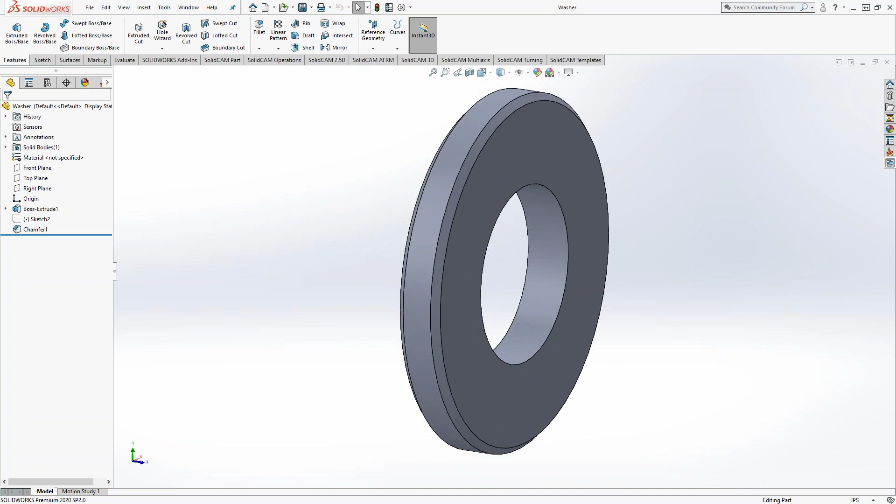So the idea is how can we group these together in one CAM part to make it worth putting this on the machine and programming this thing. So this thing is pretty much just a washer. Now this is a representative of a very basic part, but the idea here is that you have a part that you're going to do in production.

Maybe you've got tens of thousands of these, and rather than just doing one, maybe we can do 5 at a time, or as many as you can stick this thing out of the chuck and then just keep parting it off. But the idea here is you can do an operation like this where I've collected 5 of them, and I've added this little solid in the middle to collect them together.

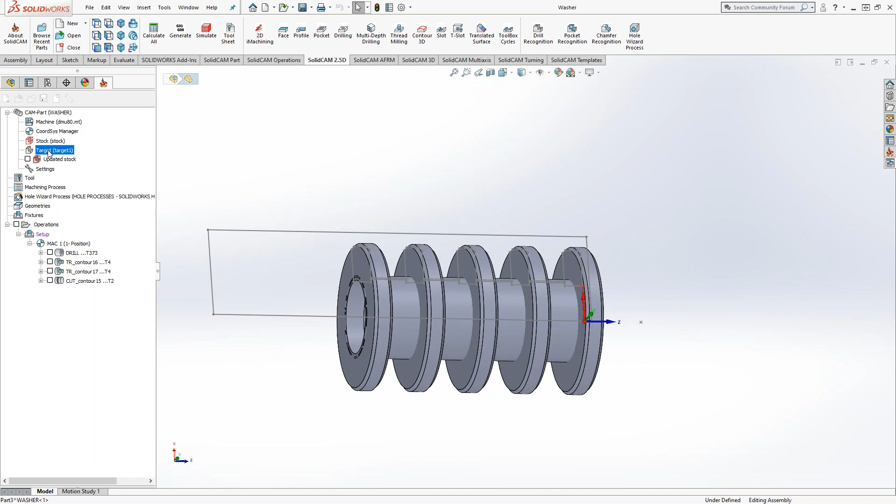That's because when you define them as a target, if I don't include that little connector solid, SolidCAM doesn't understand that those are separate solids being made out of a single stock. So you have to actually kind of trick it a little bit into making it think it is one stock. That way it gives you this cross section that you can work with.

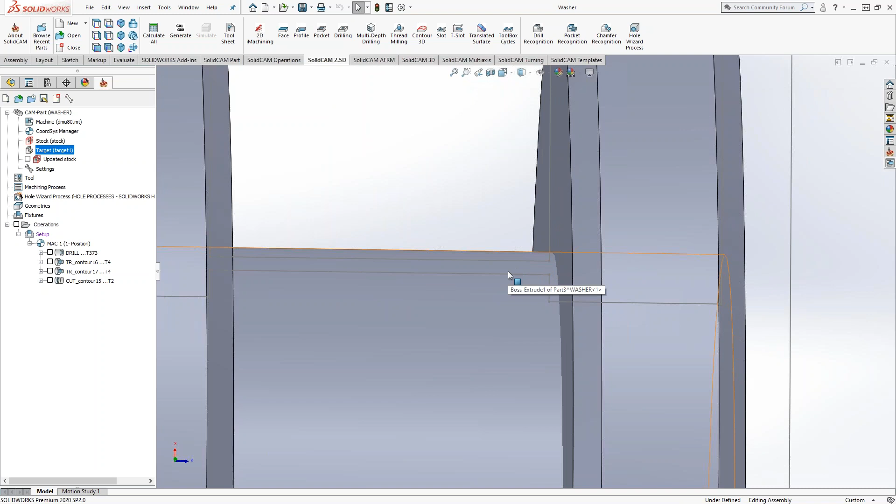And then you as the programmer realize that really this profile here is the part, and then this is a little thing here that you can just kind of gouge. Just trim that little bit off, and then it doesn't even exist anymore. So with that in mind, let's see what kind of toolpaths you can do here.

So as long as that's one target solid, I can drill the whole thing. I just did one drill all the way through, so I did 5 at a time like that. I turn the outside to bring it to size. Let me see if I can get that profile view there. So basically the same sort of thing I would have done with 1, I'm doing it to all 5.

And then you can do things like individual toolpaths. For instance, this front part, I'm just going to bring that to size, and then these other ones will have to be ground later or have some sort of secondary operation if the part is big enough. Whatever individual part file you're working with, the idea here is you've got multiple parts rather than just doing one split-second cycle time. You've got multiple that you can group together.

And if I do have something like this individual one, all I have to do is just keep doing a copy and paste if I want to keep facing or turning that front face. And then the back side can be done at the same time as when I'm doing the part off.

And maybe Kevin can comment, but I don't know if the part off is unique in this sense that you can actually choose multiple chains in a turning operation. I don't know if you could do that with any other toolpath. I don't know, I haven't tried it with turning. Neither have I, but it seems to work with the part off.

Let me show you the chains that I chose. It's actually the back side of each one of these. So essentially the toolpath is going to look like it does here. It's going to just be a part off, part off, part off, part off, part off, all in one toolpath. So you just choose as many chains as you like, and then you just get one toolpath to just part

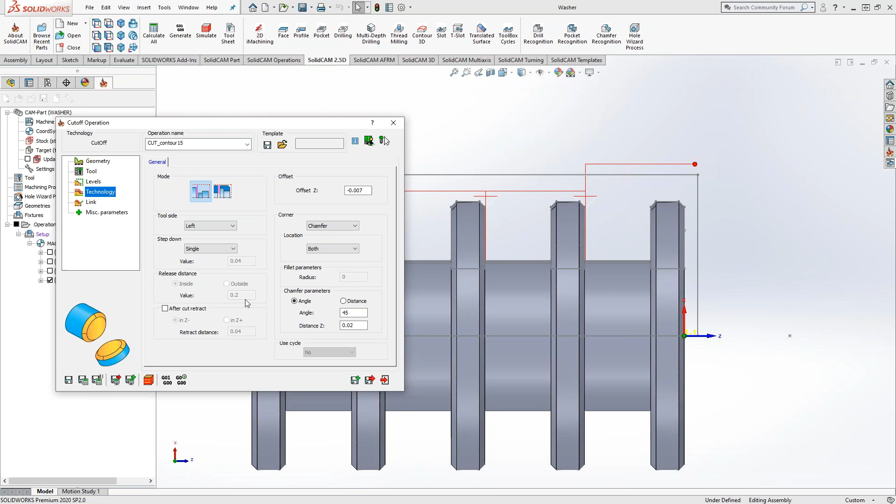all these off. And in the part off operation, another thing that probably doesn't come up that often is the fact that you could actually add a chamfer or a fillet on either side of the part before you actually do the part off. So we take a look at that real quick here in SolidCAM. Basically, the tool comes over, gets a little bit of clearance, does the chamfer on that side, and then part off. And now that thing is gone. But before it left, it had chamfers on either side.

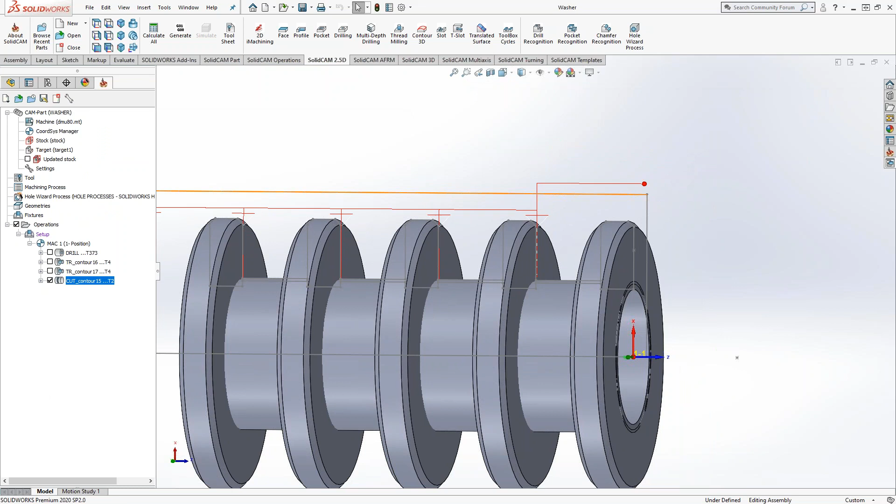Now, the reason we have to kind of do it like this is at this time, there is no transform command for a turning operation. If there was, then this would be very simple. I could just program everything for the first part and then just do a transform. But in turning, we don't have transform yet.

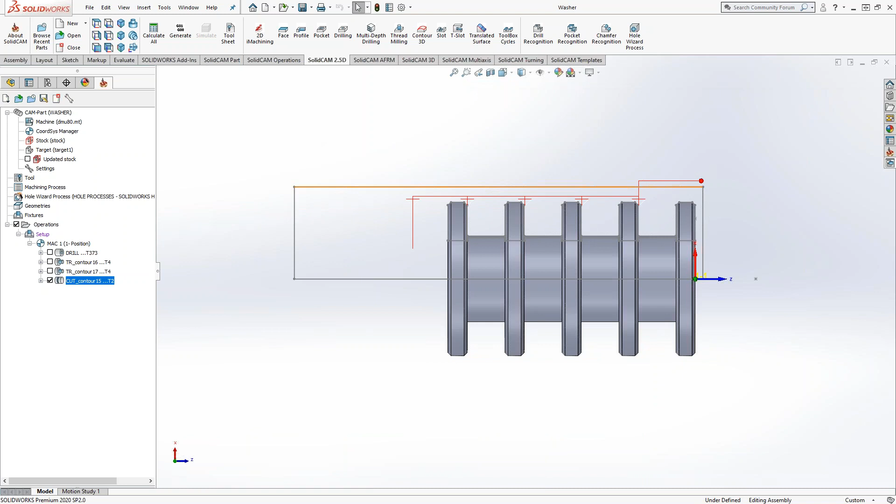So now, before we get too much further on, I just kind of thought of this as we're going here, Mark, but if this is something that you guys are doing on a common basis, what you guys can do is we can just do the one part. So like Mark was showing, that last operation, except for just doing the part off. So he did the OD turn, faced the front, and then did a part off, chamfering both sides. What the post guys can do for you is go ahead and open up that part off operation, Mark, and go to miscellaneous parameters.

In here, your post guys could put an extra parameter in here saying that we would like to do that exact same G code 4 times or 5 times, however many times you want to go through there as well. This is an option that is post-processor driven, so you would have to request to add that into your post, but that is something that can be done as well.

Yeah, absolutely. There's a lot of stuff, not just this, in SolidCAM that there's not an option currently available inside the software in the toolpath manager, but on the post side, there's a lot of stuff that can be done. I mean, it is still just simple code. There's cycles you can add.

Like I have heard in the past, not maybe with a specific application like this, but if you're looking to repeat something, then make it a subprogram. And then you can have a counter that asks you how many times you'd like to repeat that program. And then there's maybe a shift every time or something. So there might not be a transform command in the software, but there isn't something saying that you can't just do some sort of transform shifting kind of application in the post. Exactly.

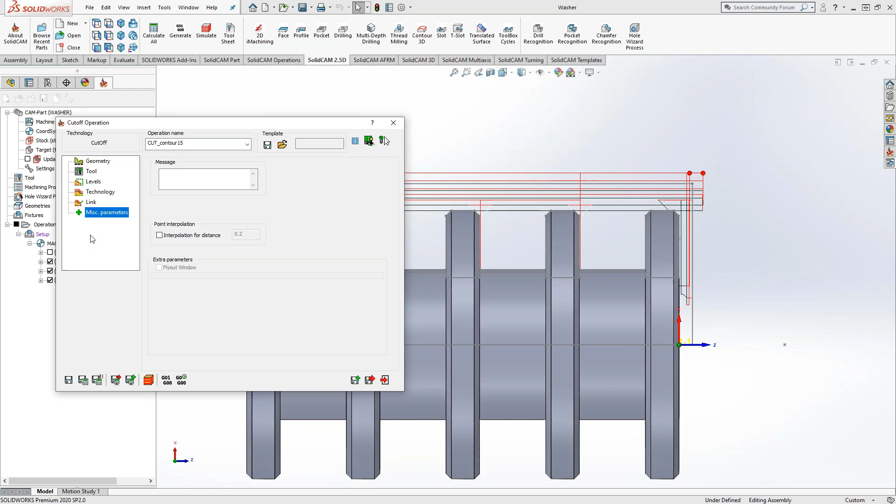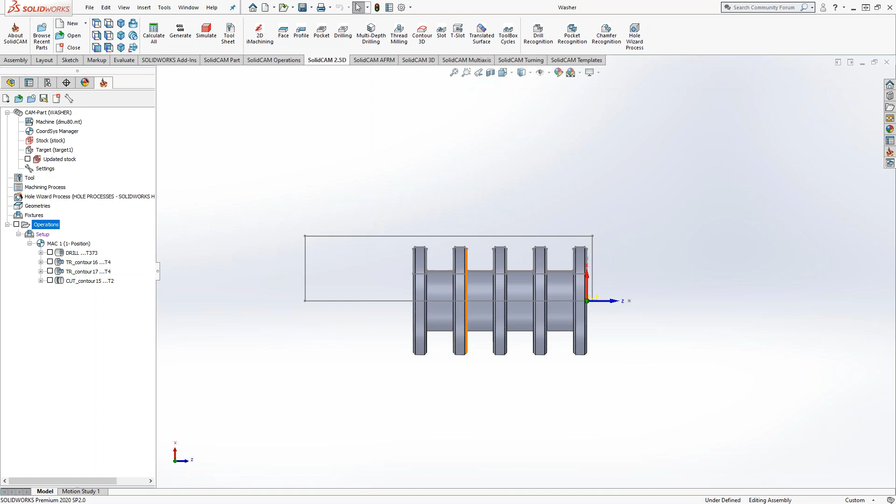So really simple application here. It's just the idea that if you're doing production parts and the individual part is just split second, maybe just group them together. However far you can stick this thing out, you could probably do 10 at a time with something like this. Multiple parts from a single stock. And really the thing that ties this all together, you probably could figure out how to do all this on your own, is just the idea that it needs to be seen as a single target.

So this simple solid in the middle here, if we open this individually, is just a cylinder, just a tube that has the same or lesser ID, inner diameter of the part, and then something that just goes into the part so that when it interferes, it looks like it's not even there. It doesn't interfere with my toolpath.

Okay, so another thing that has come up, it was actually something that was asked on the SolidCAM Programmers Facebook page. And that is, let me just open it here, the idea of using plunge pattern.

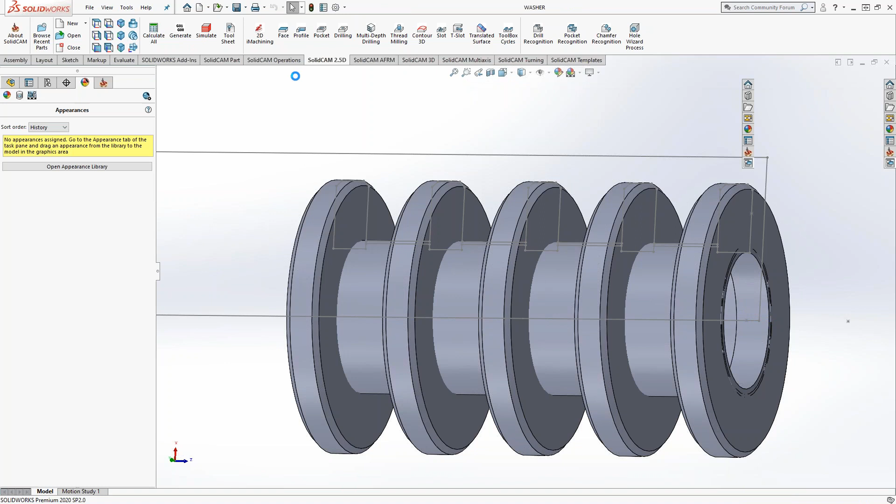So anytime you have a really deep pocket or really strong material, instead of just using a regular pocketing toolpath, you need to do something with the plunge pattern because it's a stronger material or it's too deep. You want to use a series of drill toolpaths. So with that, let's get to it. While Mark's pulling that up.

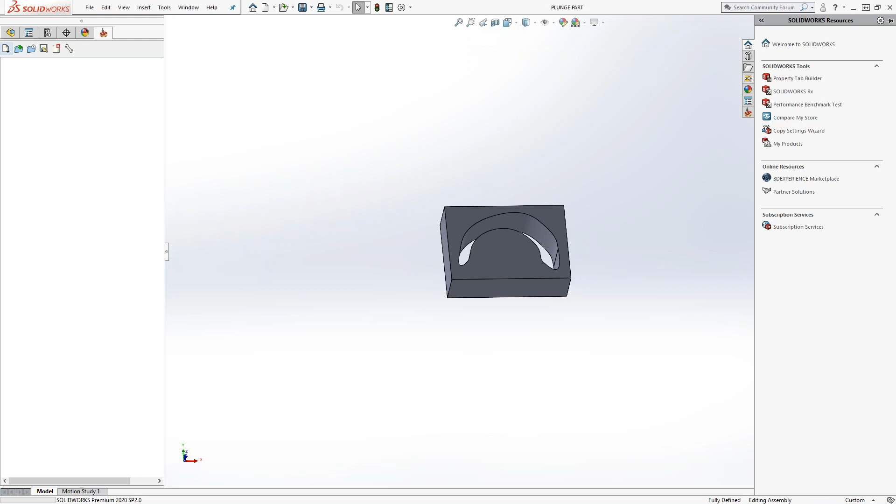For those guys that may be a little bit newer to machining, even in aluminum or any kind of material out there, we can always drill much faster and remove way more material than we can using an end mill. So just keep that in mind, and that's why they developed this plunge pattern, because we can always drill out that material much faster than we can with an end mill.

Absolutely, yeah. For whatever the application is, this actually exists in both pocketing and profile. I'm showing it here using pocket, and let me just show you what chain I'm using. The chain is actually just this weird shape, and I use this weird shape just to highlight the fact that regardless of a nice shape like a rectangle or a circle, even this weird shape, we can use the plunge pattern. Let's get into that toolpath and take a look.

So you set it up the same way you normally would. You choose that chain, you choose your tool. In this case, I chose a drill. You choose your levels. In this case, I'm doing the full depth of 3 inches. And then in technology, instead of hatch or contour, I chose plunge pattern.

The second tab shows me the parameters of that technology. In this case, it's just my drill cycle. Similar to the drilling toolpath, if I choose a cycle that requires additional information, it opens up the data tab, and then I can plug in my information.

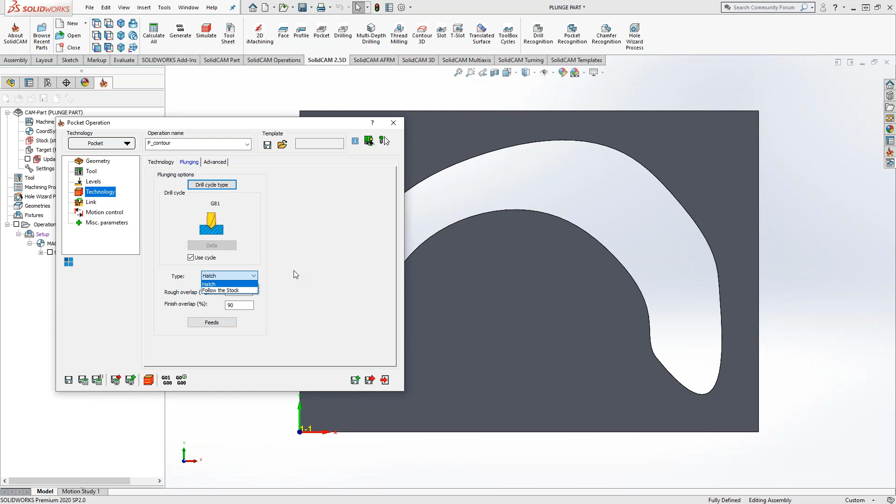And then the hatch type is really just relating to the flow of the toolpath. So if I set it to follow stock, it would actually do some sort of offset pattern. If I do hatch, we get something like this.

And while you're bringing that up, if you go back to the contour, this is if you guys were having like a big slug that you wanted to drop out. That's where that one comes in handy. If you had a big diameter, like we'll take it simple, just a big circle.

I'm holding up my hand so you guys can see it, so you got a big circle, and you can actually do a plunge pattern going all the way around the perimeter of that. At the last one, you can set it up so it will plunge out, and then that slug will drop through for you. Then you can remove that slug out of there. That's kind of what that contour one is set up for.

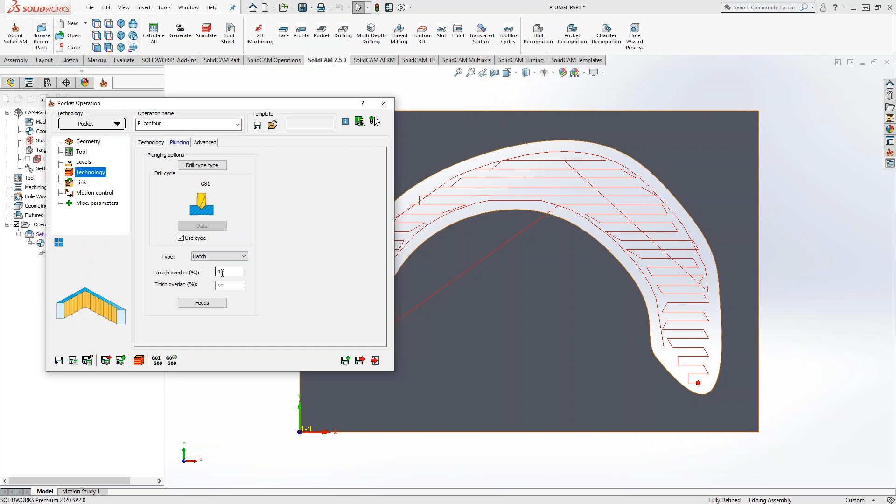Exactly. So we got hatch, we have the overlap. I actually have an overlap of 10% of the tool diameter. So when we take a look at that actual toolpath, let's get into SolidVerify. We can really see it that way.

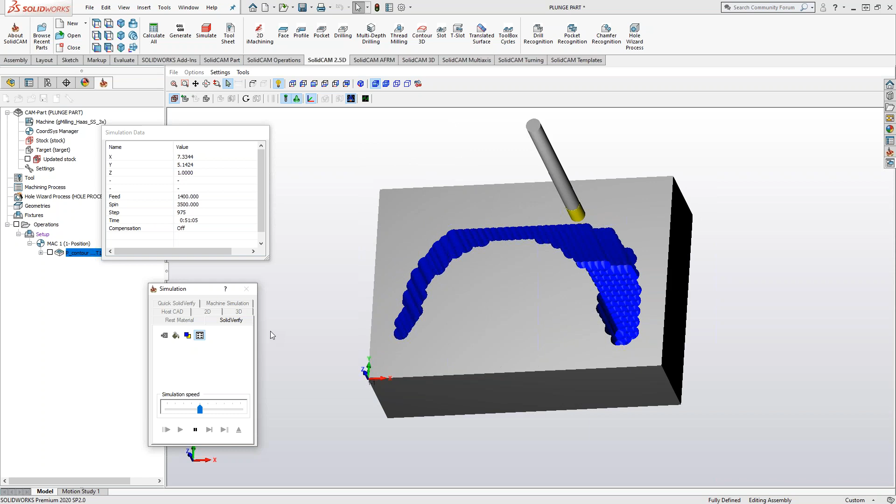Let me just get that shaded there, slow this down, and it's a series of drilled toolpaths forming that shape. Mark can set up the distance apart, how much he wants it to overlap, how much he wants it to step over. All that is all decided in that plunge pattern as well.

Okay, and that exists, like I said, in both profile and pocket. So you have the ability to do this sort of thing either just on the perimeter, like Kevin said, so you get a slug, or you get this idea here where you can actually remove all the material. So that is number 2 on the list.

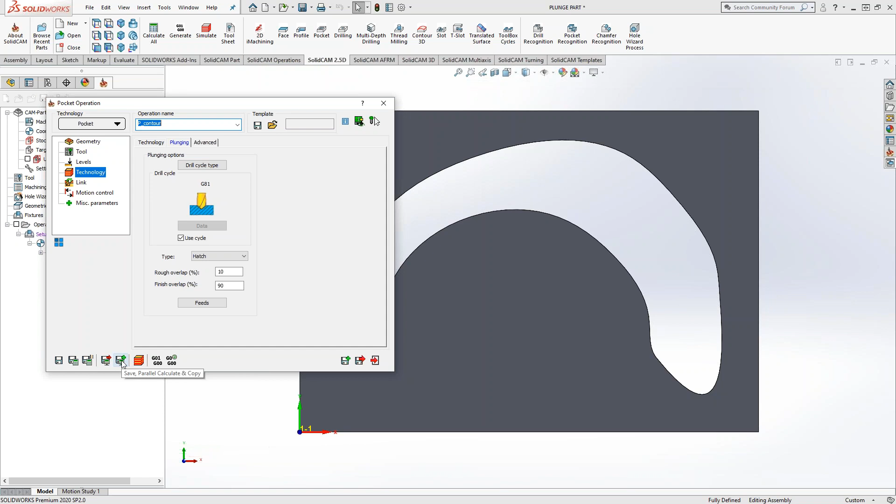And then the last is, I don't know if I really have a part to show this, but there was a question of what this thing here does. Let me just open up the operation manager. Anything relating to parallel calculate: you have save, parallel calculate, exit, save, parallel calculate, and copy. Obviously the save is saving the toolpath to operation manager, and exit and copy is similar to what you see over here—it just copies the toolpath, or it saves it and exits. But what is parallel calculate?

Parallel calculate, let's see if I can get to it. I know I can probably describe how it works, but I'm going to push it over to Kevin because Kevin actually has done this on site with a customer. So Kevin, what is parallel calculate?

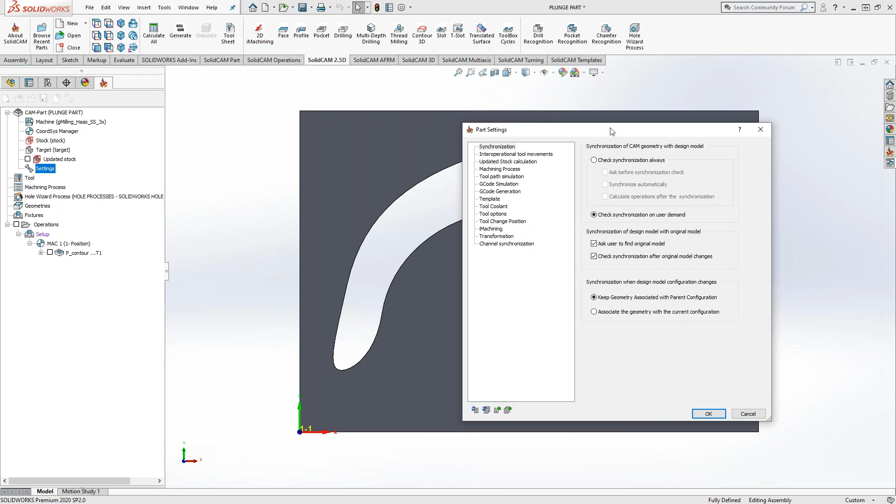So the parallel calculate is, if you're getting a toolpath, let's take for instance Mark's HSM part that we were looking at the other day. You'll notice when he did a save and calculate, it was automatic, and it was taking a little bit of time to do that. So what you guys can do is the save and calculate in parallel, and what it will do is calculate behind the scenes while you can still keep working.

So Mark, if you go ahead and open up that HSM one for me real quick. We have two different options that you guys can utilize in there.

This is kind of set up for parts that take a little bit of time to calculate. So now if Mark goes and does a save and calculate, go ahead and do it Mark, he is basically locked out. He can't do anything as he's working now. He can't add operations, he cannot do anything else except just wait for that.

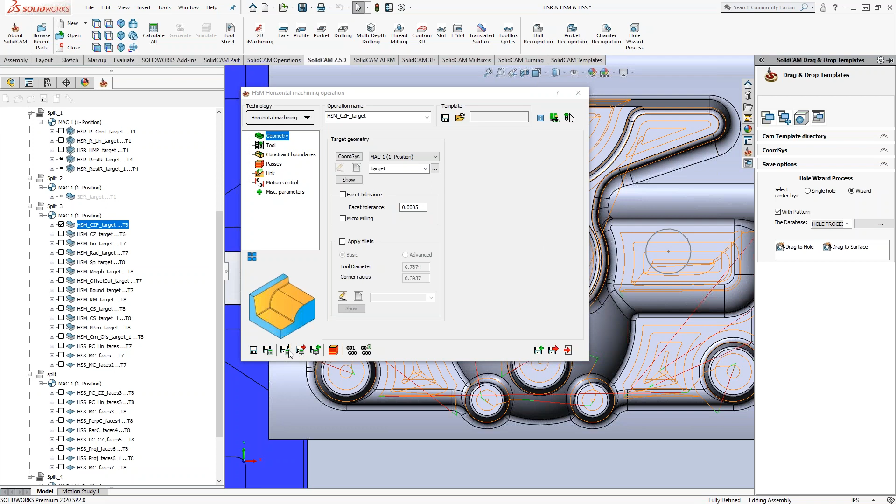Now if he does the save and calculate parallel, what it does is calculate behind the scenes and you can still keep continuing working. They also have an option where you can have this set up on a powerhouse computer. Right now you can see it's got the little lock symbol by it, and Mark can keep continuing working as it's going through.

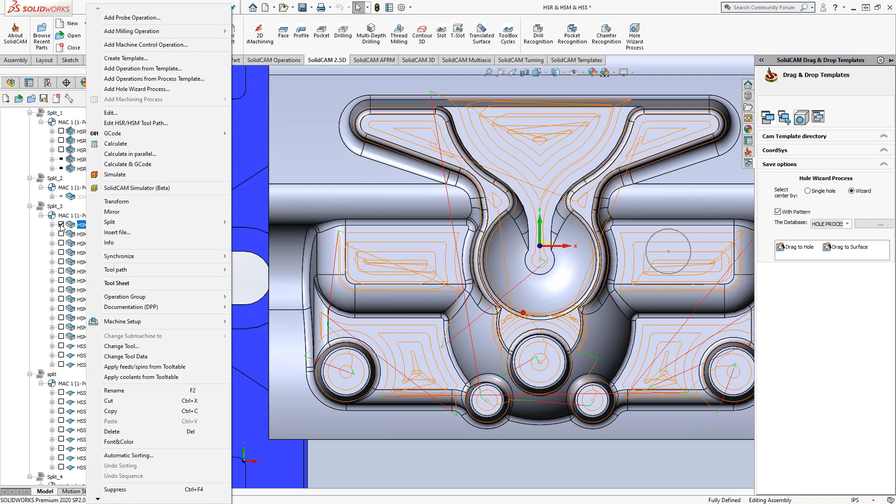But now you can also set it up in your settings to, and I'm going to pick on Jake here. Jake works at a great company that is really big in computers. What they can do is have a horsepower computer or a horsepower server, and they can actually run it so all the operations are being calculated on that computer, which is in a different room, different facility, whatever you'd like. So the calculations would be much faster.

So I could be running a tablet, but using that save and calculate in parallel and going to my powerhouse server that's doing all the work for me, all the grinding work you could say, or all the crunching of the numbers. So it's a good option.

The only thing that I'm not a huge fan of is when you guys do this, you do have to have SolidCAM loaded on that other computer as well. So even though you're not using any of that computer except for the processing power of it, you will still have to have SolidCAM loaded on there to utilize that processing power. Hopefully that makes sense.

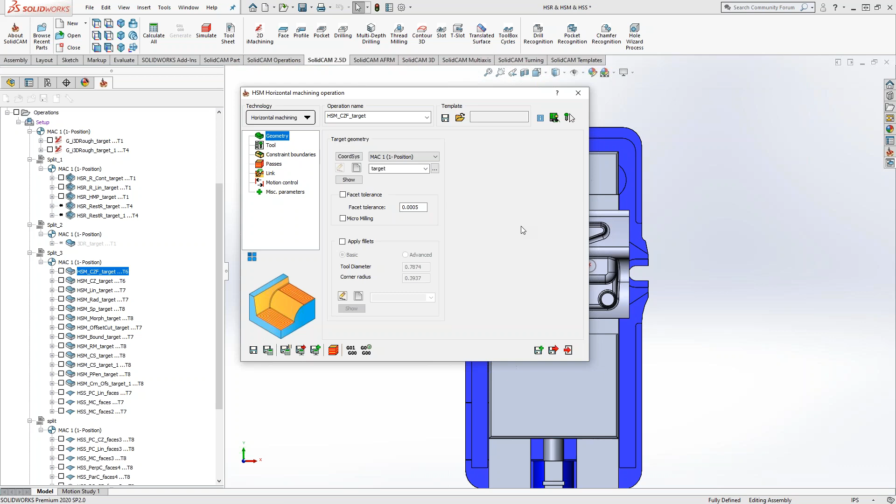Yeah, so Jake's asking the question I was trying to find, I always forget where it is. So how do we assign that parallel computer? Go ahead and open up your settings. The local, it might be in there, it might be in the global. I can't remember, I thought it was global, but let's check the part level settings.

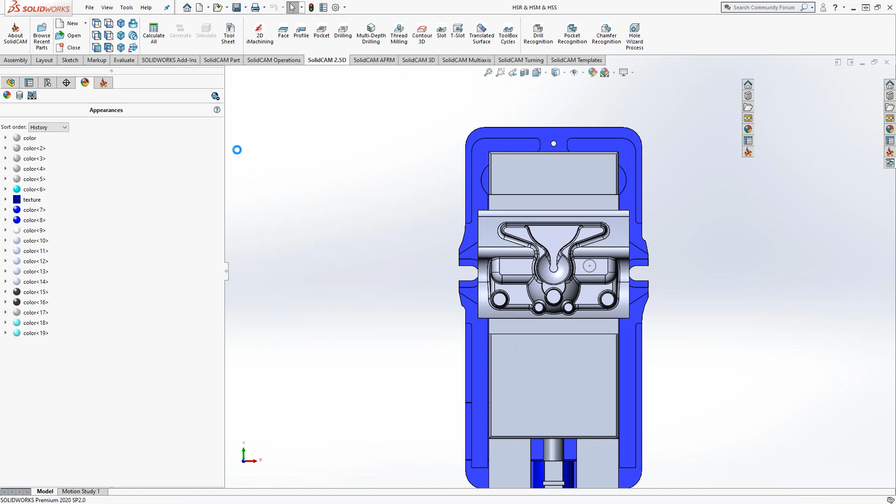Under calculation, yep, don't see it in there. Okay, so let's exit out of the part. Anytime you have to do a global change, you want to make sure you close out of your part file, and then you can go to your global settings. We'll let that compress.

Now, what I do remember about this assignment is it is simply just a location on your network. So it has to be a network-related computer. You're just basically going to point to it using this setting once we find it. And you can have it set up like if you're running a network just between two computers, so it doesn't have to be this big extravagant computer networking system or anything like that.

Okay, toolpath. I've seen that you had it up there. I don't think that's it. You may just have to go through these real quick, I kind of forgot where it was. Okay, so it's not there. G-code? No. G-code simulation? Nope, no.

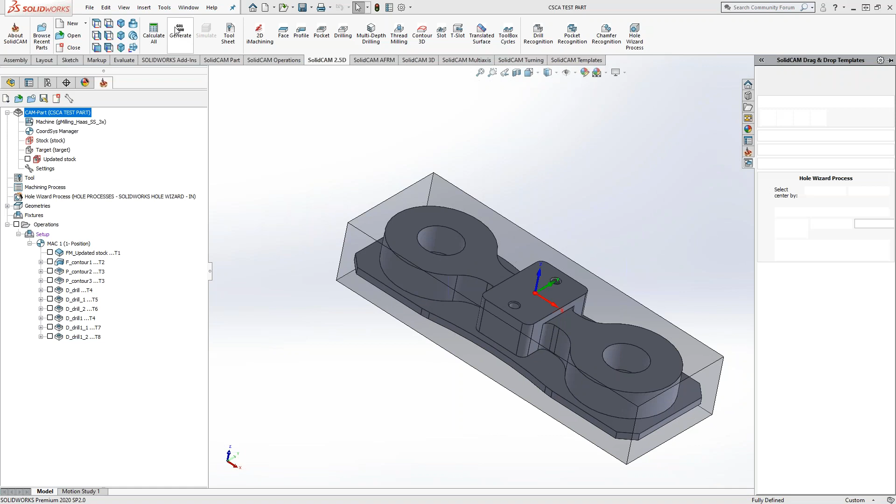Speaking of calculation, is there a way to calculate all that needs calculating? Yes. If I understand your question correctly, let's go to that turning operation, that's the best one that describes it. Okay, I called this washer, let's grab that one. There it is. This is really apparent in a turning operation because all the operations that come after it are dependent on the updated stock.

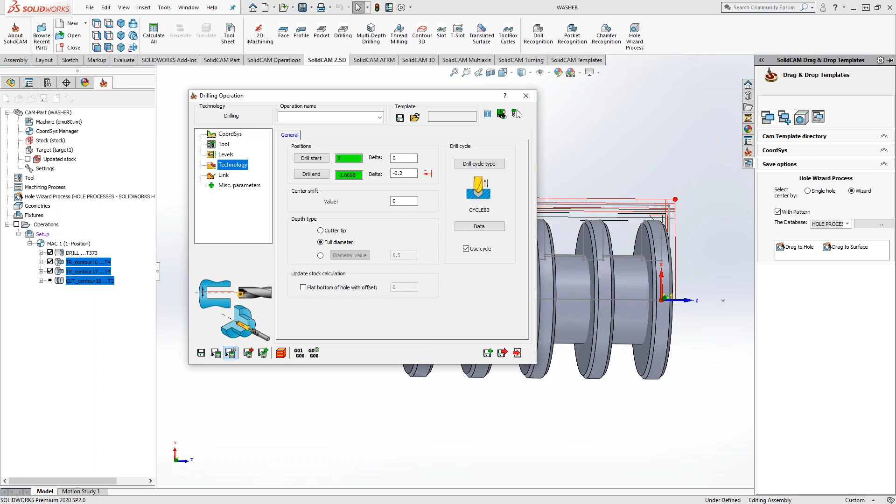So if I change this in any way, let's say I go a little deeper, a really small, inconsequential change, but as soon as I do a save to that, they all want to be recalculated. So if I understand your question, rather than going back out of here and individually calculating them, instead of just save and calculate, I can click on save and calculate related operations. Anything that needs to be updated because of this change will now be updated as well, so all the toolpaths will automatically be recalculated.

Yeah, and this is a great point, Brian, thank you for mentioning that. That was added, I think, in 2017 when they started doing all about the updated stock. Now I wish they would go in there and remove the save and calculate button because that should be your new go-to button, the save and calculate related operations.

Especially when you guys are using iMachining, or like Mark is showing us here on turning, no matter what he does, just changing a drill bit size or something as simple as a depth, since everything is based off of updated stock, all those other operations are going to need to be calculated. So using save and calculate related operations there should be your new go-to button, so you won't ever have to run across exiting out of there and then going in and calculating all the rest of them.

And then Jake, you're asking about that parallel calculation, so yes, that's what I was kind of getting at. Jake's asking if that would take up a seat of SolidCAM to run on that other computer. And yes, SolidCAM would have to be installed on there, and then it would pull down a seat of what you're trying to calculate.

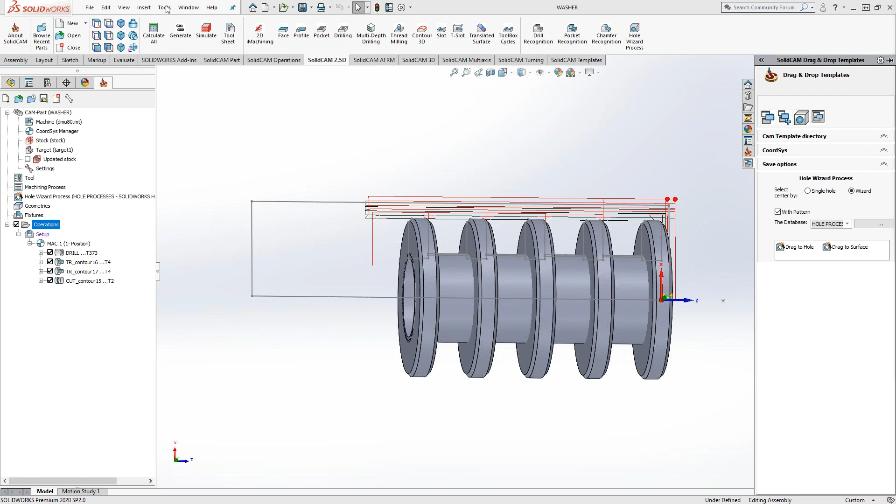Did you see the one from Charles? Yes, so to adjust the start point, a good example of that is let's go back to that banana shaped part there, that was the plunge parts.

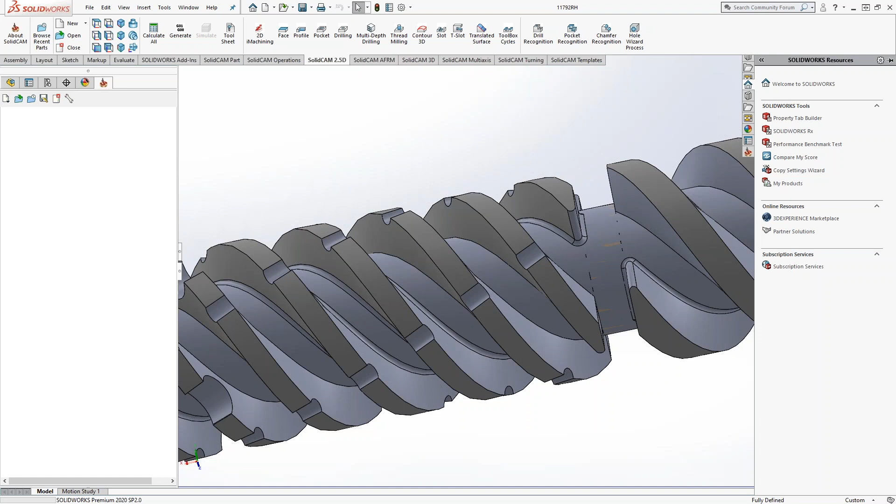A simple example of that is if you had a pre-drilled hole. If the drilled hole was part of a drilling operation that was just before the pocketing toolpath, then in certain toolpaths you actually have the ability to select that as your start point. I don't know what's wrong with my system today, why it keeps opening other people's parts, but this is a nice little crazy thing here. It's a large part, so it might take a while to open.

So there is a way to choose a pre-drilled hole as your pilot hole, especially in things like iMachining, because in iMachining it's looking to avoid using the helical entry. So if you add a stock that looks like it already has a pilot hole, or a pre-drilled hole large enough to avoid the helical entry, you can include that in your 2D or 3D iMachining and it will recognize it as well. Specifically with the pocketing style toolpath, you can choose that drill operation as the start point, the pre-drilled hole. If you're using just stock, let's say you have a sketch set to open to represent the hole, or you're telling it to start down a specific hole, there's a way to do that as well.

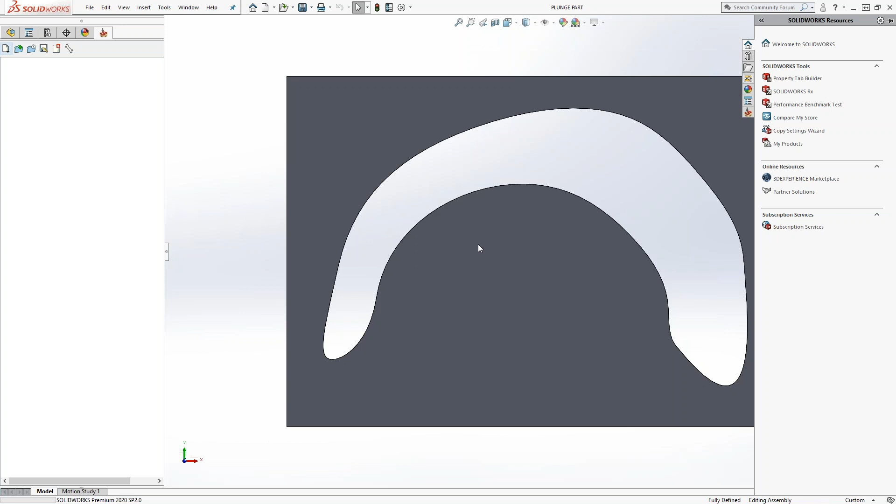Once we open up this part, there it is. Okay, let me just go into part, we'll do a sketch on the top face, and we've got 6 minutes left so let's make sure we pull this off. I'd like to start right there. Okay, let's go in there and set up a new pocketing toolpath.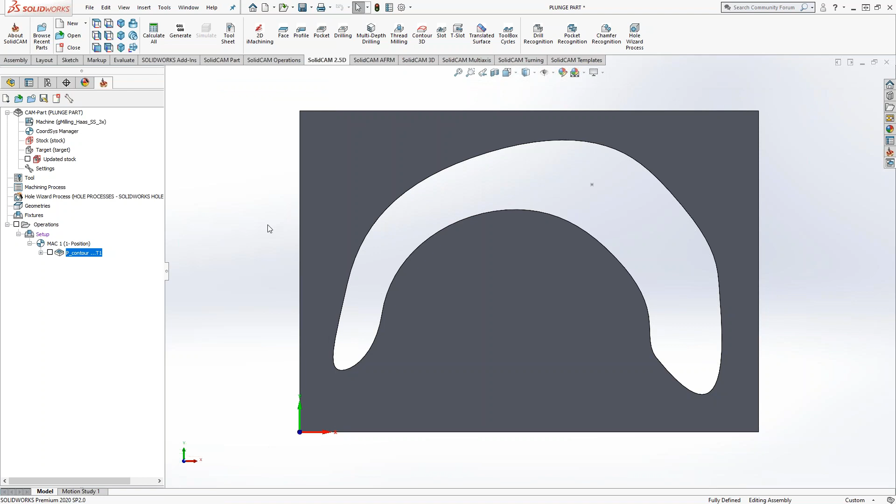And I'll just reselect the chain so I can differentiate them. So we'll do constant Z. There it is. Okay, and then tool, I'm just going to add a quick tool. So we'll default it to the 1/4 inch. Good enough. Okay, and then levels, bottom of target.

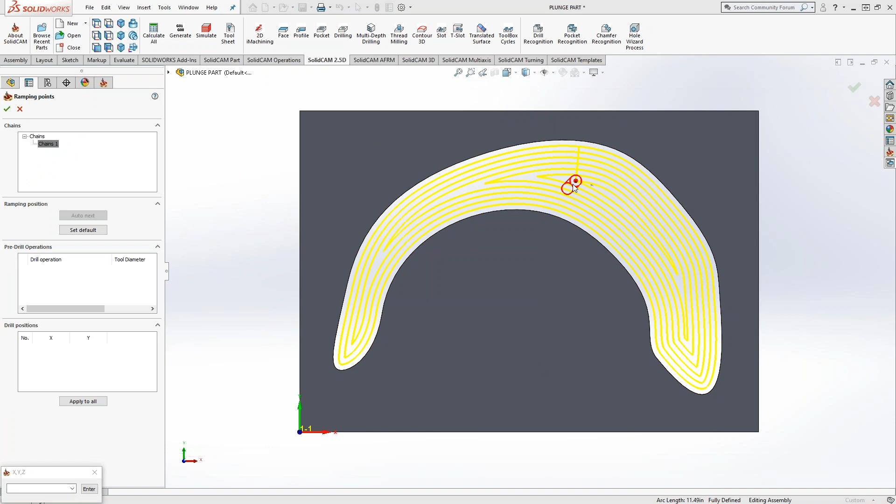So technology, you can do your contour, your hatch, and whatnot. It's more about the link section, and either we can get it to do the helical down that center point there, or we can do just simply vertical. And I guess we can set that point there. So my start point is that point.

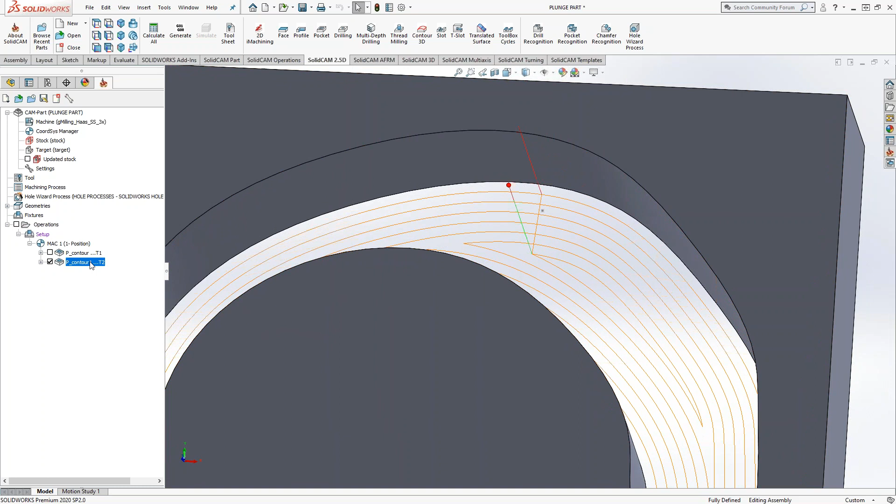And then anything else I should add, Kevin? Another way of doing it too is if you guys want to drill it out. So if Mark is looking to start drilling into that operation, we can add a drill operation in there, and then he can identify that as an open pocket, and then it would approach right through it that way as well.

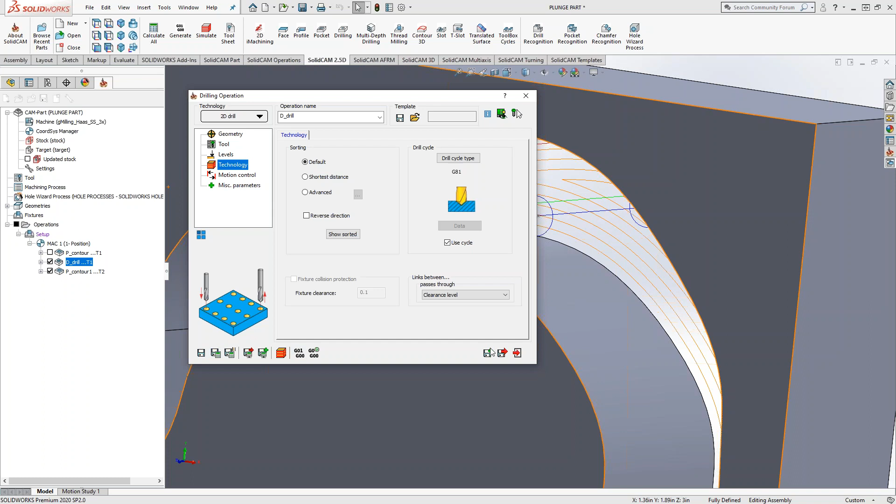So we'll use the drill that's already there. Again, we'll go to the bottom of target, set that up as it is, drill. Okay, so now we have a drilling toolpath that came before that pocket. Let's go in there. And in this case, go to points and hit that checkbox. There you go. There it is. Okay, so they put it there now.

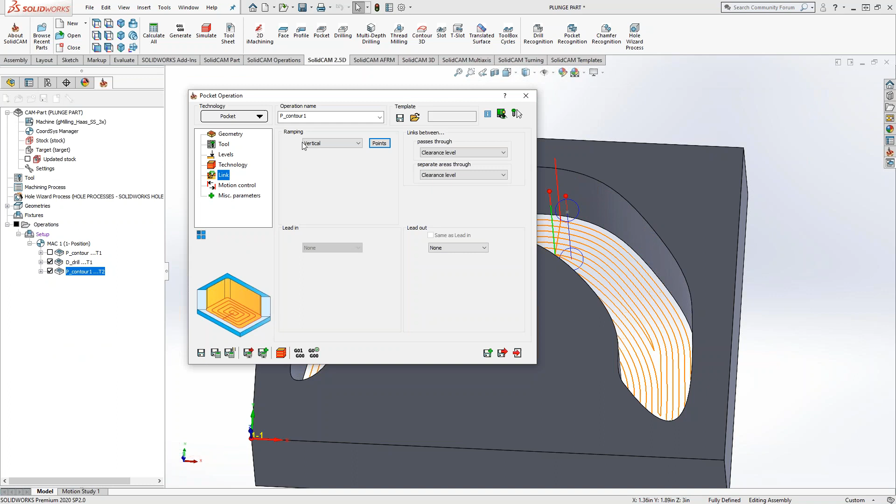In 2D machining, it actually is its own tab, I think. Yep. Yeah, but in here, you can do it like that. So save and calculate, and now we move it to that other point. So now it pre-drills down that hole. And Mark, go ahead and just draw right where that point is. Draw just a circle that's a 1/2 inch.

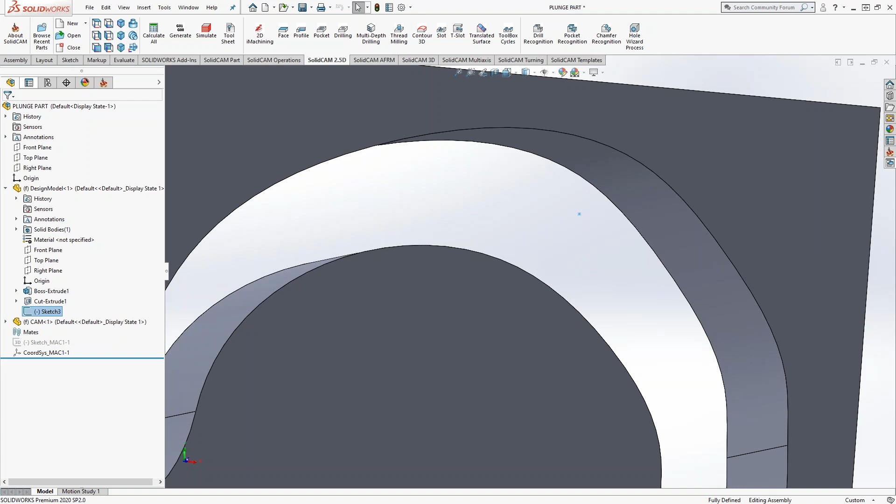Okay. And you don't even have to go in there. Just right-click, do sketch. Oh, okay. I usually like to put it in the part, but yeah, that's good. All right, so let's do that. Go over there. And you said 1/2 inch? Yep. Okay. So 1/2 inch hole. Now let's go ahead and open up that drilling.

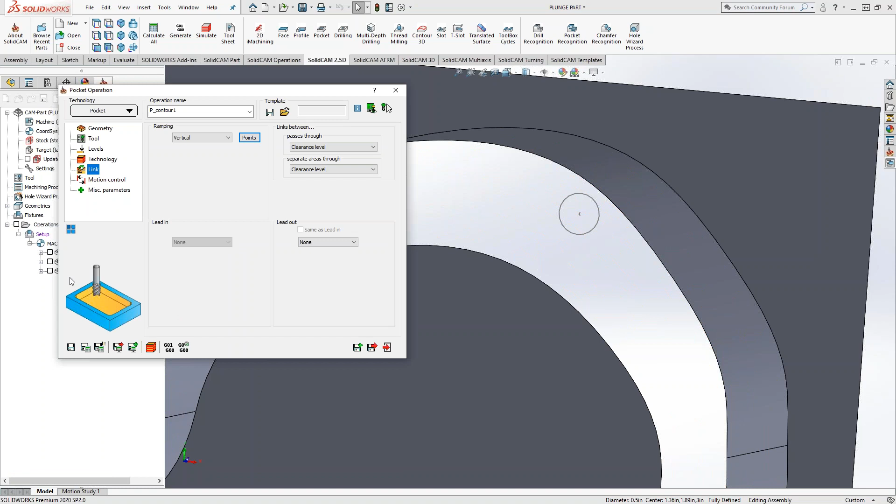Now when Mark goes and grabs his geometry, he'll chain that circle and he will chain the outside contour and he'll mark that circle as open. So it's letting the software know that that material has already been removed out of there, and that usually is where it will want to start. So I'll just take the pre-drill off so it looks for that hole for us. And there you go. We're starting right down in there.

And even if Mark put the ramping to none, it would still start right in that circle geometry. So that's another way of telling it to use a start point. I think that's what you're looking for, Charles. Yep. Okay. Okay, perfect.

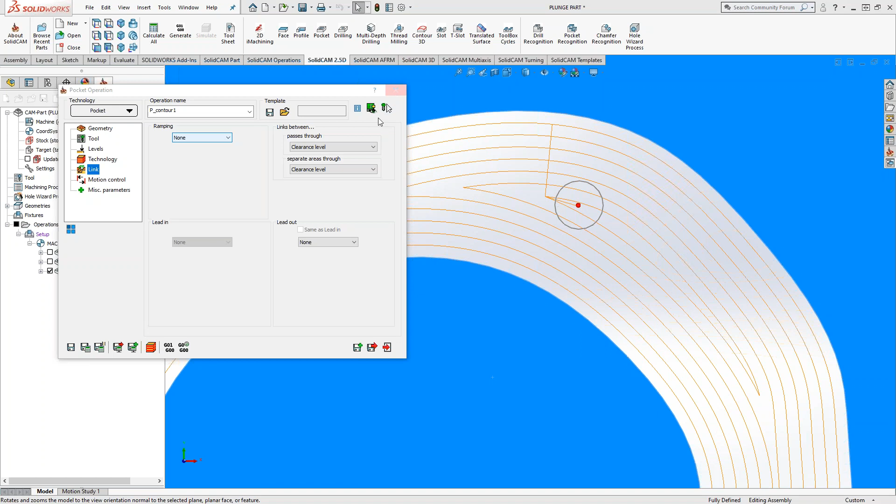And then Brian is looking for the save and calculate. Brian, I guess, are you saying like if we had a list of 15 operations and only 5 of them needed to be calculated? Hopefully Brian's still with us here. Okay, so what you can do is hit the calculate all button right there. And it will tell you, all right, go ahead and click it, Mark.

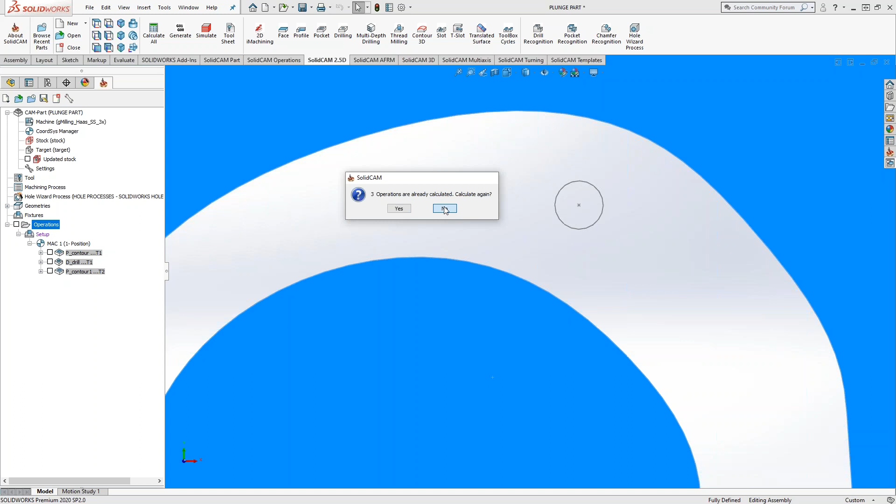So it says 3 operations have already been calculated. Calculate again? If you hit no, it will skip those operations that are already calculated and go right to the ones that are uncalculated. And Mark can achieve this by going up to the very top on your ribbon and clicking the calculate all button right there, so it's a little bit easier to get to. And so that will calculate just the ones that are out of sync. So, yep.

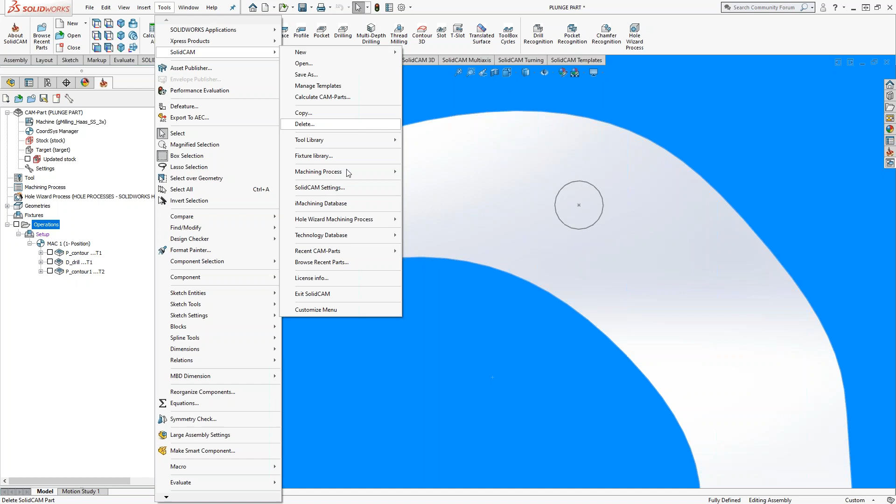Great questions, guys. Love seeing all these questions in here. Jake, you got to have one more for us, because you're my new guy I get to pick on during the SolidCAM Live. But all right, I don't see any other questions in here.

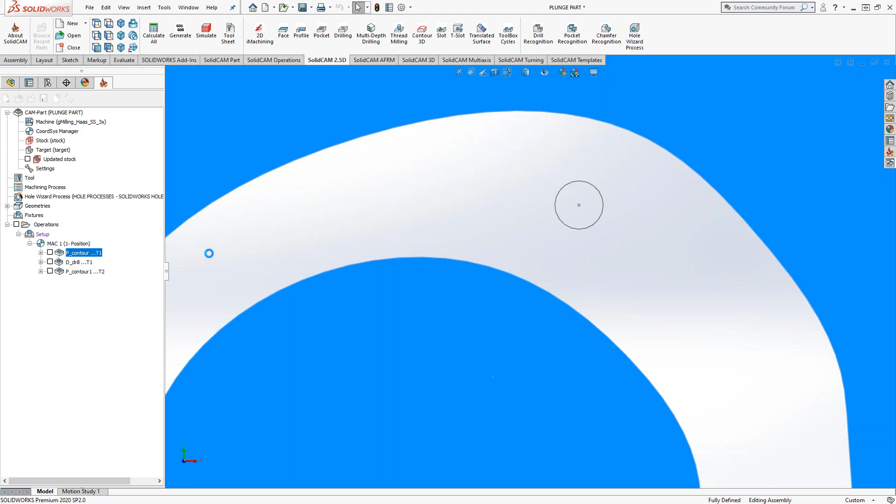So what we'll do, how do you keep plunging from breaking the drill? I'm not sure what you mean by that, Brian. How do you keep plunging? Maybe too much of an overlap? Like if it's overlapping with a previously done hole or something? Or it could be too much of an overlap and the drill's wanting to wander.

Yeah, so what you can do is you can switch over your overlap, so your rough and your finish right here, to be different patterns. So instead of doing like a 10% overlap, you can put a 0 overlap, so your drill would not be breaking through. Go ahead, yeah.

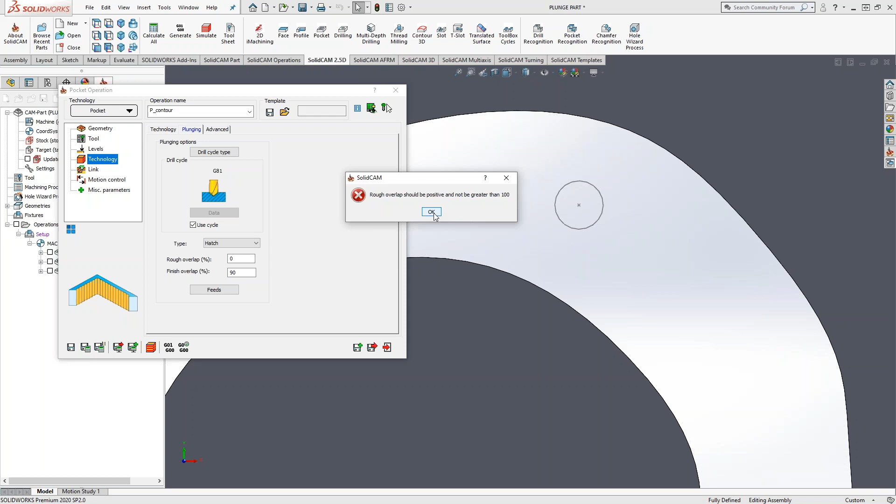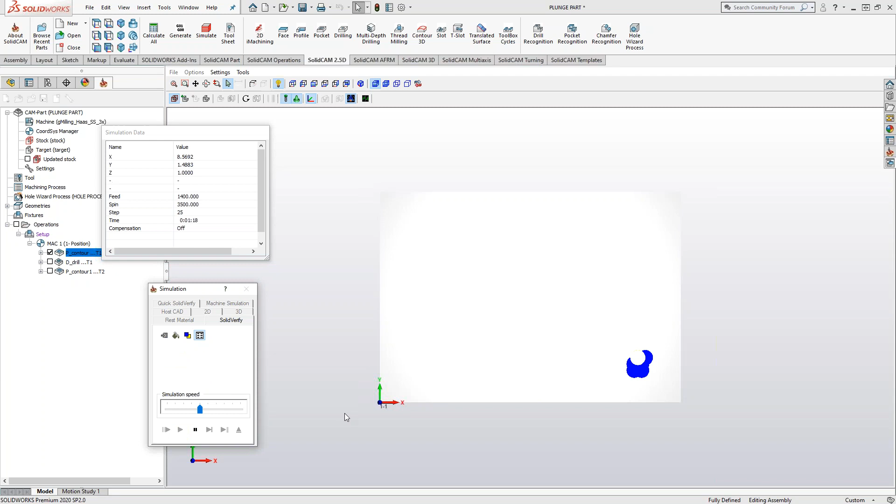So I find a lot of times in SolidCAM, if it says it has to be above 0, you can put like a really incrementally small amount, and then what happens is you get something like this. Let's take a look at that plunge pattern now. Yeah, we're still getting a lot of overlap. I think it's because of finishing. That's why. For whatever reason, it thinks it's the finishing. Yeah, let's take that off.

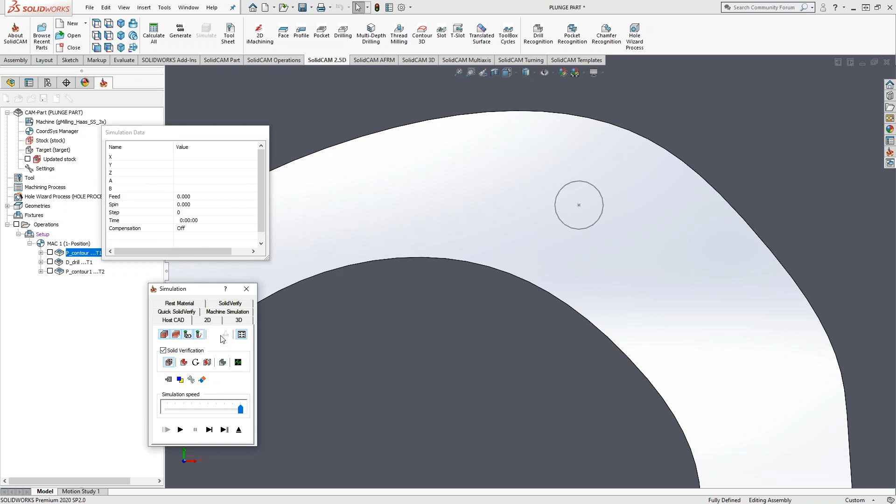Actually, let's continue with host CAD, but we'll just do the 2D. That should show us the circles. Yeah, we're getting tons of overlap there. Yeah, Jake, I think it has to be a positive. I don't think we can do a negative overlap.

Let's go ahead and hop out of here, Mark. Let's go to the technology. Okay, we don't have any wall finish turned on, so that should be fine. All right, let's go back to the plunge. And what happens when we click on the feeds? Is that just bringing up our feed chart? Okay. Yeah.

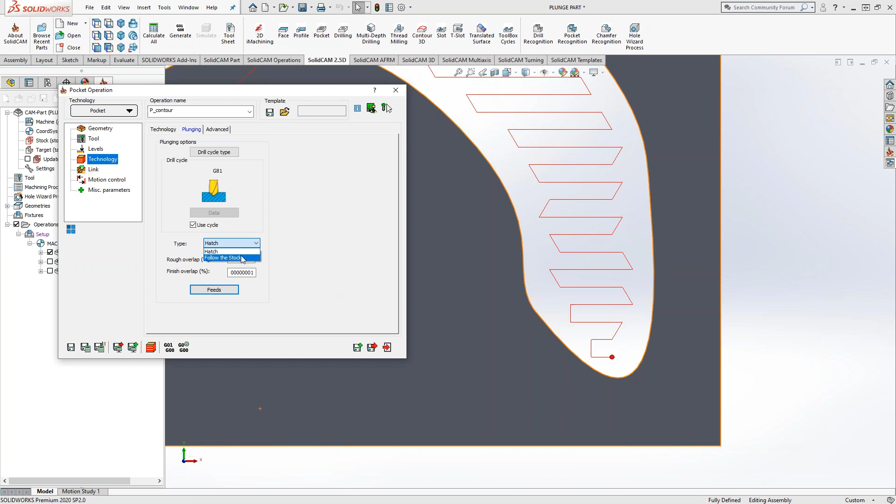See, this one's more of an overlap from what I can see by the wireframe here. Maybe let's play that one through. Oh, okay. So that one has that incremental amount. There it is. So I think that's the one that you would want to use, Brian. So we're drilling pretty much fresh holes each time. And this is kind of almost nesting in a way. It's trying to fit as many of those drill bit holes into that pocket geometry.

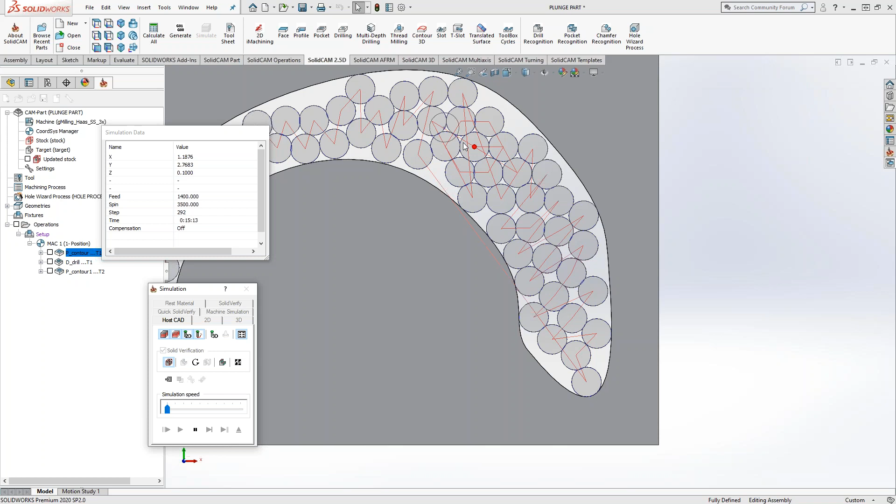Mark, did it alarm out when we put a 0 in there? It did. Let's go back in there. Let's make that 0. Let's make this guy 0 as well. Save and calculate. And rough overlap should be positive and not be greater than 100. Yeah. So you can't overlap 100%, but you can't do 0 either. So just by putting that 0.0001 in there, that will get you what you're looking for.